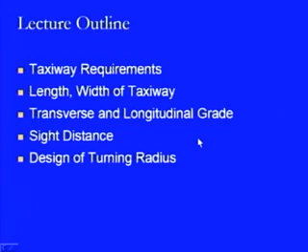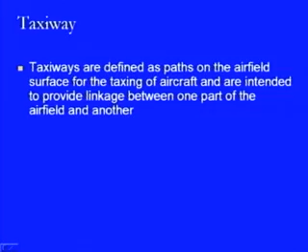We start with the taxiway and try to define what is a taxiway. Taxiways are defined as paths on the airfield surface for the taxiing of aircraft, intended to provide linkage between one part of the airfield and another. This means we try to provide connectivity for aircrafts which are arriving at any airport, so that they can taxi on this particular lane away from the active runway strip on which continuous movements are going on. In that sense, it provides connectivity between different locations or parts of any airport, and all such connectivities are termed taxiways.

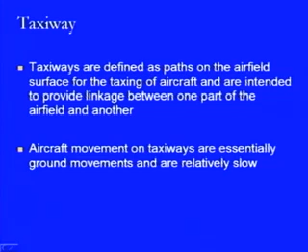These taxiways have aircraft movement which are essentially ground movements. There is no air movement associated with these, and the movements are relatively slow, much slower compared to the speeds at which the aircrafts have landed or at which they are going to take off.

Another type of taxiway is the dual parallel taxiway. This name itself shows that there are two taxiways laid parallel to each other, and in this case the functional condition is that the taxiways can be exclusively used for single directional operation. That is, on two taxiways we have two opposite directional movements, where the aircraft will be taxiing in opposite directions.

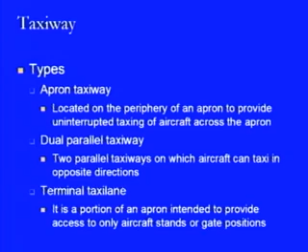Then the third type of taxiway is known as the terminal taxi lane. This is provided very near to the terminal building, and it provides access to the terminal in terms of access to the gate positions or stands where aircrafts can stand, so as to take the passengers, or so the passengers coming out of the aircraft can disembark. At that particular location, in between those locations, whatever lane is provided is known as the terminal taxi lane.

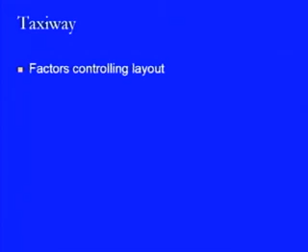We now look at some factors which control the layout of any taxi lane or taxiway. The factors are that there should be minimum interference between the just-landed aircraft on a runway strip and the ready-to-take-off aircraft coming towards the runway strip. This means there are two simultaneous operations going on: one aircraft is landing, while another is ready to take off. So connectivity must be provided such that there is minimum interference between these two types of operations and they cross each other with minimum hindrance.

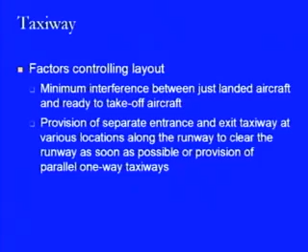Further, there should be a provision of separate entrance and exit taxiways at various locations along the runway, required so as to clear the traffic coming on the runway in terms of landing aircraft as soon as possible, making them available for the other landing operation or takeoff operation. In this case we can also provide parallel one-way taxiway systems, where on one taxiway aircrafts are coming towards the runway strip, while on the other taxiway aircrafts are coming from the runway towards the terminal area. That is how parallel one-way taxiways can be provided.

Another important thing at the time of fixing the layout of taxiways within the overall airport space is that there should not be any intersection of a taxiway with the active runway.

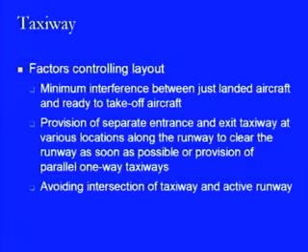The reason is that these two components have different speed conditions. The active runway has a much higher speed value, whereas the taxiways have the speed of aircraft which is quite low. Therefore, if there is an intersection, then movement of an aircraft on the taxiway from one side to the other side of the runway strip will cause delay for aircrafts using the runway for takeoff. At the same time, if there is a landing, it may create a hazardous condition or even an accident if such an operation is going on at an intersecting taxiway and runway.

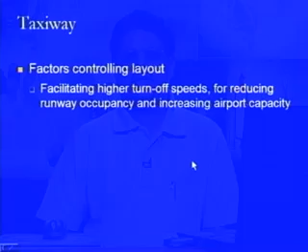Further, there is a requirement of facilitating higher turn-off speeds for reducing runway occupancy and thus increasing airport capacity. What this signifies is the design feature of the connectivity of a taxiway with the runway.

This design feature should help in facilitating the turn off at a much higher speed, and if this is possible, then with a little reduction in the speed of the landing aircraft, we will be able to take the aircraft off the runway strip and bring it to the taxiway strip. This will help in reducing the overall occupancy time of the runway strip by an aircraft, meaning the same runway strip can be used for another operation, and thus the airport capacity will increase.

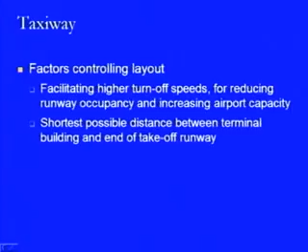Another point is that there should be the shortest possible distance between the terminal building and the end of the takeoff runway. This needs to be taken care of so as to provide the minimum travel from the terminal building to the runway strip at the time of takeoff. We also try to have a similar condition for aircrafts which are landing and come towards the terminal building or towards the airport stand to which they will be taken, so that passengers can deboard.

With these aspects in mind, we will now look at the different geometric features of any taxiway. These include the length of the taxiway, the longitudinal gradients, the rate of change of longitudinal gradients, the width of taxiway, the sight distance, the transverse gradient, the width of the safety area, and the turning radius.

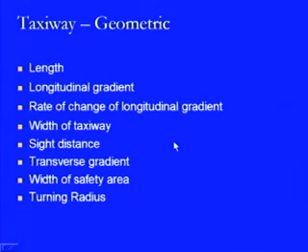So, these are the different geometric features which we will be looking at, and it is in a similar form as we have done in the case of the runway strips.

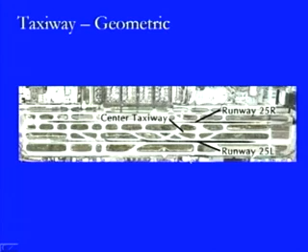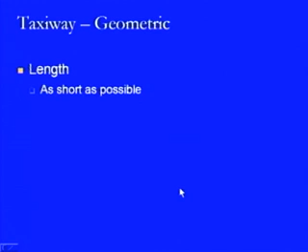With this aspect in mind, we start with the geometric features, that is the length. The length of the taxiway should be as short as possible. It will increase as more taxiways have to be provided along the runway. As we have seen in the previous case, there were different connectivities, so it will increase the overall length of the taxiway.

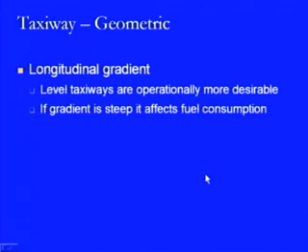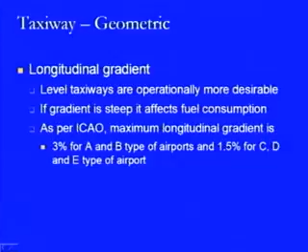In the case of the longitudinal gradient, level taxiways are operationally more desirable, similar to the condition for runway strips. If the gradient is steep, it affects fuel consumption. This is again similar to what we discussed for runway strips. As per ICAO, the maximum longitudinal gradient is fixed depending on the type of airport: for A and B type airports it is designated as 3% maximum, whereas for C, D and E type airports it is defined as 1.5% maximum.

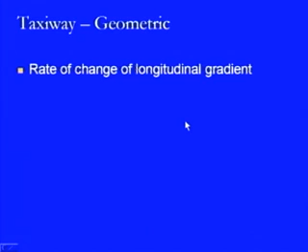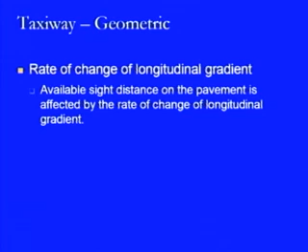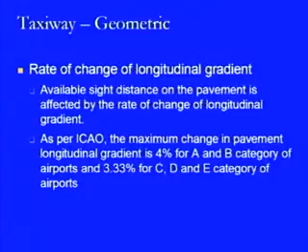Another specific feature related to the longitudinal gradient is the rate of change of longitudinal gradient. This rate of change is controlled by the sight distance available, and the available sight distance on the pavement is affected by the rate of change of longitudinal gradient, so it is a vice versa condition between the two things. Again, as per ICAO, the maximum change in pavement longitudinal gradient is fixed at 4% for A and B category airports, and at 3.33% for C, D and E category airports. So these are the specifications related to the rate of change of longitudinal gradient.

In the same case, for the rate of change of longitudinal gradient, this change of grade should be smooth enough. It should not create any jerk at the point where connectivity is being provided, otherwise it will be problematic for the movement of aircraft across that point. So smoothing is to be done, and this can be provided by the use of vertical curves, as we have seen in the case of runways, railways, or highways - the concept remains the same.

Therefore, vertical curves of 30-meter length are provided at such junctions. There is another specification associated with this, along with the rate of change. We are talking here about the vertical curve, and its length is fixed at 30 meters.

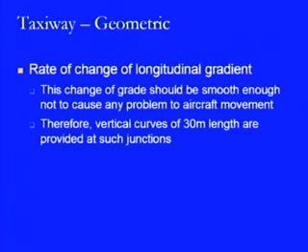Now, in the case of airports designated by letter A and B, ICAO recommends the length of the vertical curve as 25 meters for each 1% grade change. So if there is a greater percent of grade change, we multiply it with 25 meters to get the length of the vertical curve.

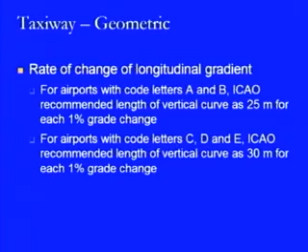Whereas in the case of airports designated by code letters C, D and E, ICAO recommends the length of the vertical curve as 30 meters for each 1% change in grade. So these are the specifications with respect to the type of airport and the recommended rate of change, along with the length of the vertical curve and the overall value to be provided.

Then similar conditions apply with respect to FAA. FAA recommends the distance between points of grade changes. This is what we saw in the diagram of grade change from x to y to z - that is plus x to minus y to plus z - with a change in gradient from x to y designated A, and a change in gradient from y to z designated B. For taxiways, FAA defines that this value can be 30 times of A plus B.

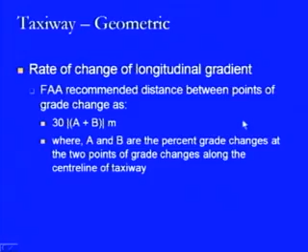This A plus B is taken in absolute form, where the effect of positive or negative value is taken away. So A and B are the percent grade changes at the two points of grade change along the center line of the taxiway. This is another recommendation and guideline for provision of different grades, while maintaining a distance between those changes of grade.

Now we come to another geometric feature of the taxiway - the width of the taxiway. The width of the taxiway is lesser than the width of the runway. The reason is that aircraft are not airborne and speeds are small in this case. Therefore we can control the movement of the aircraft better compared to movement on the runway, because a small change in the controlling feature of the aircraft when it's on the runway at higher speed may be disastrous, whereas on the taxiway, because speeds are very low, the steering will not create any big effect even if the taxiway width is lower.

Further, there is not much variability in the maneuverability of the aircraft. That is what I was discussing - in normal movement of the aircraft on the taxiway in a certain direction to reach the destination, that is the terminal or the runway, the nose of the aircraft mostly follows the taxiway center line. This is the guideline provided, that the pilot follows the center line of the taxiway and the nose keeps moving along it, and whatever width is required for that is to be provided.

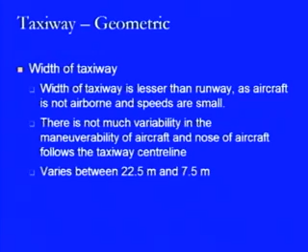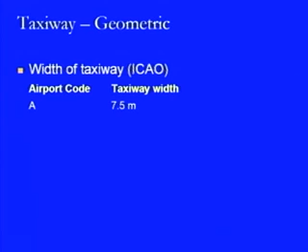Generally, the width of the taxiway varies between 22.5 meters and 7.5 meters. As far as ICAO recommendations are concerned, the width of the taxiway is defined in terms of the airport category. If the airport code is A, the taxiway width is 7.5 meters. If it is B, it is 10.5 meters. If it is C, it is 15 meters, and it is at times provided as 18 meters if the taxiway is used by aircraft with a wheelbase equal to or greater than 18 meters.

In case of a D category of the airport, the taxiway width value is 18 meters, and similarly here also it is enhanced to 23 meters if it is used by an aircraft with an outer main gear wheel span equal to or greater than 9 meters.

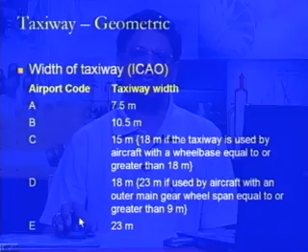In the case of category E, this value is 23 meters. So these are the various categories of airports for which the taxiway widths have been defined, and these vary from 7.5 meters to 23 meters.

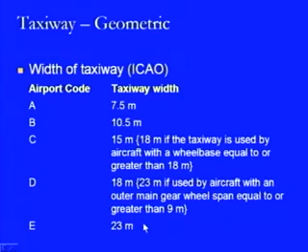Now another specific geometric feature of taxiway is the sight distance. As we have discussed, this sight distance is more important at the connectivities.

As the speed of the aircraft on taxiway is lower than the speed on the runway, a smaller value of sight distance is sufficient on the taxiway.

We know that we have computed the value of side distances from the very starting when we studied highway engineering, and there we have seen that as the speed keeps on increasing, the sight distance keeps on increasing.

It becomes something like 180 meters at a speed of 100 kilometers per hour, whereas at a speed of 40 kilometers per hour the sight distance requirement is around 50 meters.

So in a similar form here, taxiways are governed by lower speeds of aircrafts, and therefore the requirement of sight distance is also lower.

ICAO recommends that the surface of the taxiway must be visible at least up to a distance of x from any point at a height of y above the taxiway surface.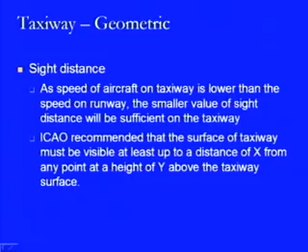That is, if we are at any point at a height of y above the surface, then we should be able to see up to a distance x.

How these x and y values have been defined by ICAO, we will look at those values. They have been defined with respect to the airport code, that is the categorization of the airports.

For the airport code A, the y value, that is the height above the pavement surface, is 1.5 meters, and in this case the sight distance should be 150 meters.

Whereas in the case of airport code B, the height is 2 meters and the distance is 200 meters. For C, D and E category airports, the height is 3 meters, whereas the distance is 300 meters.

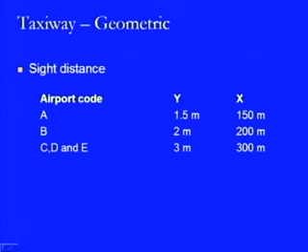Now we look at transverse gradient. This is another type of gradient which needs to be provided and considered when any of the geometrics have to be taken up.

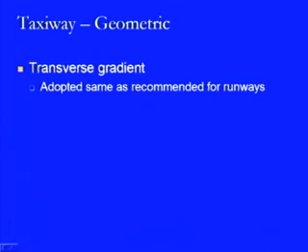Basically, they are provided so as to drain off the water and bring the taxiways back to a dry condition.

This ensures there is no slipping and no ponding of water on the taxiways, which may be detrimental or hazardous for the movement of aircraft on the taxiways.

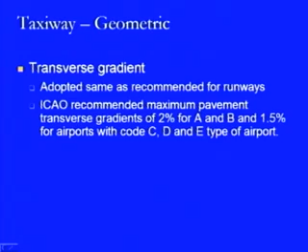ICAO recommends a maximum pavement transverse gradient of 2% for A and B category airports, whereas for C, D and E category airports, it is defined and designated as 1.5%.

There are also recommendations given by FAA. FAA says that a transverse gradient of at least 3% is to be provided for shoulders which have been turfed or provided with some fixed objects.

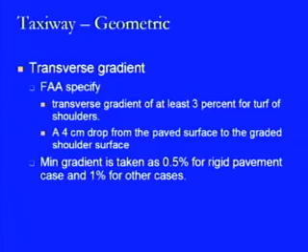This remains the same as in the case of runway strips, because here as well as there the concept remains the same, and that is the drainage of water.

Further, values are defined by ICAO where the minimum transverse graded portion is defined for the maximum transverse value, for the various airport codes ranging from A to E.

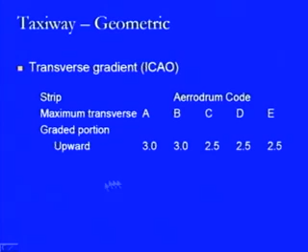In this case, if the graded portion is in the upward direction, the values range from 3% to 2.5%, starting from A to E.

If it is in the downward direction, we find that it is provided in a constant form at a rate of 5%.

Similarly, in the case of the ungraded portion, if it is in the upward direction, the value remains at 5%.

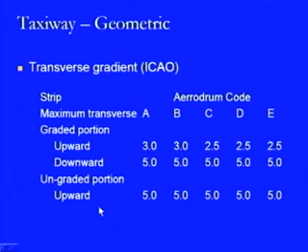The other thing we have to look at is the safety area and the width or total space to be provided for the safety area. The safety area is made up of partially paved shoulders on either side plus the area which is graded and drained.

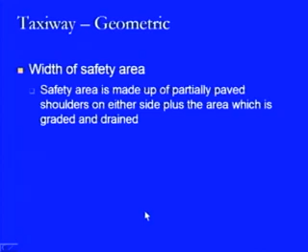And in this case, as we have seen in the case of runways also, we have to look at the area provided on the two sides as well as the area to be provided on the ends.

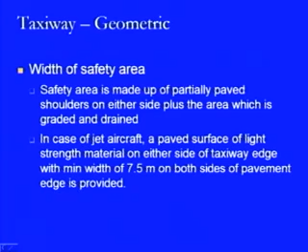In case of jet aircraft, a paved surface of light strength material on either side of the taxiway edge, with a minimum width of 7.5 meters, is to be provided on both sides of the pavement edge. Whatever is the width of the taxiway lane, varying between 7.5 meters and 23 meters, on the sides of that 23 meter taxiway lane we can provide 7.5 meters on one side and 7.5 meters on the other side. That means 15 meters more, and that becomes the overall safety area.

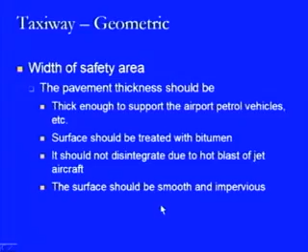Now we look at the width of the safety area - that is another geometric feature. The pavement thickness should be thick enough to support the airport patrol vehicles, etc. Another thing is the surface should be treated with bitumen and should not disintegrate due to hot blast of the jet aircrafts, and the surface should be smooth and impervious.

We have already seen what should be the size of the width of the taxi safety area, but apart from that there are certain things which need to be taken care of with respect to pavement thickness that have been enumerated at this point.

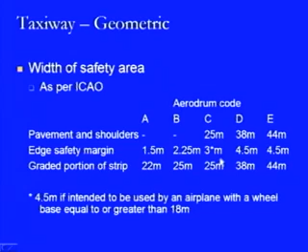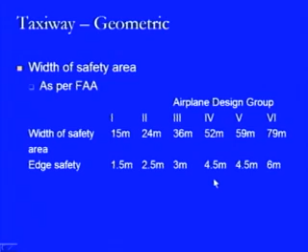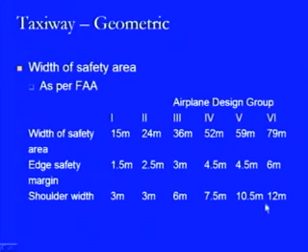In the case of edge safety, it is 1.5 meters for the first category, 2.5 for the second category, 3 meters for the third, 4.5 meters for fourth, again 4.5 meters for fifth and 6 meters for sixth category. Then we have the shoulder width, which is 3 meters for first and second categories, 6 meters for third, 7.5 meters for fourth, 10.5 meters for fifth and 12 meters for sixth category.

Now we come to another important aspect of the features of taxiway, that is the turning radius. This turning radius provides the transformation or movement from the runway to the taxiway, that is from a high speed to a low speed condition.

We have to adjust the turning radius so that it makes it possible for aircraft to take a turn at higher speed onto the taxiway and come to a lower speed condition. So the change in the aircraft path is done by providing a smooth horizontal curve.

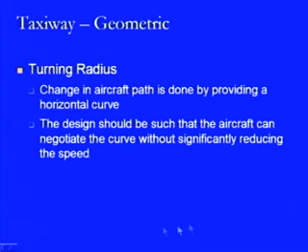The design should be such that the aircraft can negotiate the curve without significantly reducing speed, because at the time of the change from the runway to the taxiway through the connectivity - that is, the circular curve being provided - there should not be much change in the speed. Whatever speed the aircraft is coming with, it should be able to negotiate the curve.

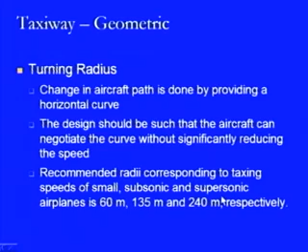The recommended radii corresponding to the taxiing speeds of small subsonic and supersonic airplanes are 60 meters, 135 meters and 240 meters respectively. For planes with a speed less than Mach 1, it is 135 meters, but if the speed of the plane is more than the Mach number, then it is 240 meters.

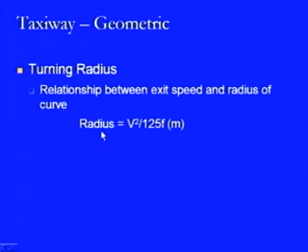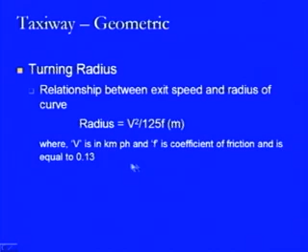The relationship between the exit speed and the radius of the curve is ascertained, and this value can be computed by this formula: the radius is V squared divided by 125F, and this value will come out in meters. Here V is in kilometers per hour and F is the coefficient of friction, equal to 0.13, which is fixed. So we have the fixed value of F, and another constant as 125. Therefore, there is only one variable which governs the radius, and this is the speed at which the aircraft is taking a turn.

So this is a turning speed, not the speed at which it is moving on the runway. So this turning radius, this is how we define it here in this diagram.

There is, say, the supersonic aircraft, meaning an aircraft which is coming at a much larger speed as compared to normal conditions, and we have this center line condition. So what happens is that in this case, if this is the 60 meter radius at which it is being provided, this is the center of the nose gear following the center line of the taxiway, meaning this nose gear is trying to follow the center line of the taxiway being provided like this.

So this is what the condition is, and then there is another pathway being shown on this side, and this pathway is the path of the point midway between the main gears.

So when the pilot is trying to maintain the nose along the center line, the two gears which have been provided, one on each side, will be adjusting themselves, and this will be the center line of those two main gears, meaning there will be one wheel moving somewhere here and another wheel moving somewhere here, and that is how they will keep moving on the two sides of this particular center line. So there is such an orientation which will be there.

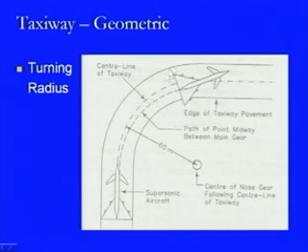Therefore, we have to provide this curve in accordance so that this aircraft does not go away from the edge of the taxiway pavement. So that is the main thing which is to be maintained, and this type of condition should not get created.

We will also look at some more diagrams here. This is another diagram where we can see a plane which is coming on this side, and this is the runway strip in this direction, meaning the aircraft is coming along the center line of this runway strip. So this axis of the aircraft is just superimposing on the center line of the runway strip.

And then as this connectivity is being provided, so we have this center line like this. So this is the center line of the curve, and then this is a position which is taken by the aircraft after taking the turn on the taxiway, and again it is aligned with the center line on this taxiway, with the wings coming out into the safety area.

So what is happening here is that this nose gear tries to track beyond the intersecting taxiway center line. This is a condition where it is trying to follow a judgmental approach of the pilot. The pilot is trying to move the nose of the aircraft along this pathway, the red pathway being shown here. This is on the basis of the judgment of the pilot.

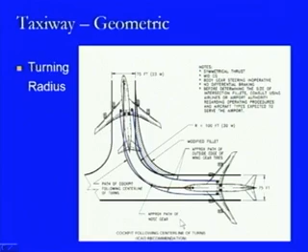So what we found is that according to Horonjeff, for supersonic aircraft, the radius of curve should be such that a minimum distance of 6 meters is maintained between the nearby main gear and the edge of the pavement. That is the premise, the principle or concept taken by Horonjeff. So clearance is 6 meters, and in this case the radius is given by 0.388 times the square of W, divided by the difference of 0.5 T minus S.

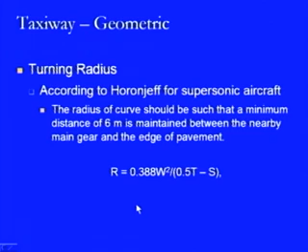According to Horonjeff, R is the radius of the center line of the taxiway in meters, W is the wheel base of aircraft in meters, T is the width of the taxiway pavement in meters, and S is the distance between the point midway of the main gear and the edge of taxiway pavement in meters.

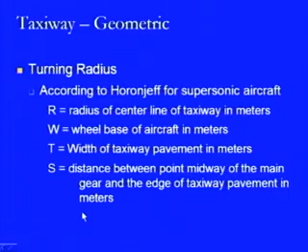This is how the values have been defined for this turning radius. This S, the distance between the point midway of the main gear and the edge of the taxiway pavement, is computed as 6 plus wheel tread divided by 2. This wheel tread we have already discussed - it is the distance between the two main gears located below the wings.

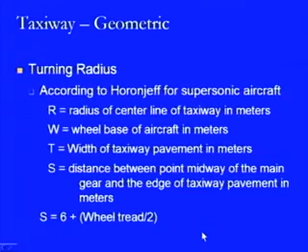Now we come to the fillets, which are the extra wide areas, as we have seen already, provided at the curve and traffic lane intersections so that the rear wheel does not go off the pavement edge. That is the function of the fillet. The minimum radii of the fillet is dependent on two things: the angle of intersection of the traffic lanes - that is the runway or the taxiway, or the taxiway or the taxiway, or the runway or the runway - and the wheelbase of the turning aircraft.

If the size of the aircraft is big, the wheelbase will be big, and therefore it requires a bigger turning area. Where if the size of the aircraft is smaller, the wheelbase will also be smaller and it can take a turn in a very small area. So the requirement of the fillet is governed by both things: the specification of the aircraft and the intersection angle.

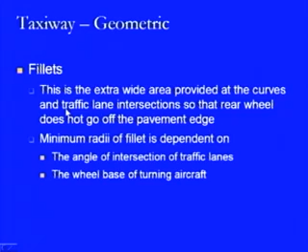The radii is not specified for wheelbase greater than 20 meters, and it is to be determined graphically using the path of the nose gear.

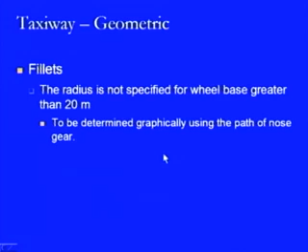For an angle of intersection between 0 and 45 degrees, the radii of fillet in meters for a small airport is defined as 7.5 meters, for a large airport it is taken as 22.5 meters. Whereas if the angle of intersection varies between 45 degrees and 135 degrees, the value for a small airport is 15 meters, whereas for a large airport it is 30 meters. If the angle of intersection increases beyond 135 degrees, the radii of fillet is 60 meters for small airports, and also 60 meters for large airports.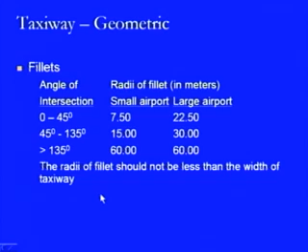This radii of fillet should not be less than the width of the taxiway - that is another thing to be considered.

Now we look at the fillet for different conditions. In the case of the small airport, we have the runway strip and the taxiway. Here the turning is more than 135 degrees, so the radius should be 60 meters at this location, where at another location it is governed with respect to an angle of 45 degrees, and therefore this radius is 7.5 meters. In another condition where the runway is connected with the taxiway, the angle is between 45 and 90 degrees, therefore the radius is 15 meters, and for an angle between 90 and 135 degrees the radius also remains 15 meters. That is for the small airport condition.

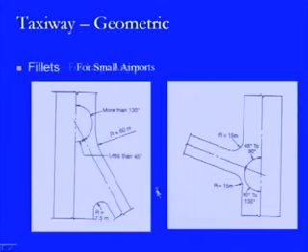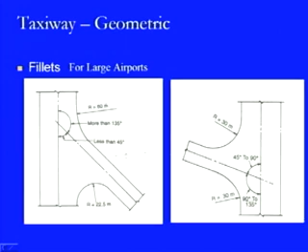In the case of large airports, again at 135 degrees the R remains 60. If it is less than 45 degrees, it becomes 22.5 meters. This is another diagram as we have seen for smaller airports. For 45 to 90 degrees, the radius is 30 meters as shown here, and similarly for 90 to 135 degrees the radius again remains 30 meters. So these are the typical diagrams or typical connectivities which can be provided.

Now we look at another aspect - the separation clearance between the taxiways which needs to be provided. This depends on the navigational aids, the type of the airport, and the wing span. These are the three factors which control the separation clearance.

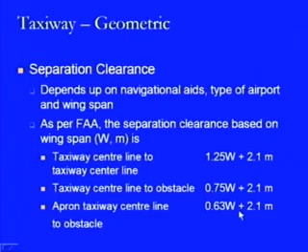As per FAA, the separation clearance is based on wing span. For taxiway center line to taxiway center line, it is taken as 1.25 times W, where W is the wing span, plus 2.1 meters. For taxiway center line to obstacle, it is taken as 0.75 times W plus 2.1 meters. For apron taxiway center line to obstacle, it is taken as 0.63 W plus 2.1 meters. So this is how we can compute the separation clearance based on wing span as given by FAA.

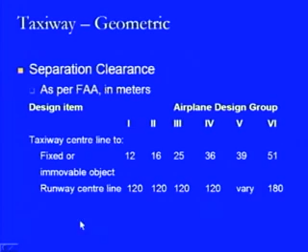Further, in the case that we are taking the distance from the taxiway center line to the fixed or immovable object, the range of the separation clearance varies from 12 meters in the case of design group 1 to 51 meters in the case of design group 6, with values of 16, 25, 36 and 39 in between. For the distance between the taxiway center line and the runway center line, the values in most cases are 120 meters. In the case of group 6, it is 180 meters, whereas in the case of group 5, it varies with the airport elevation.

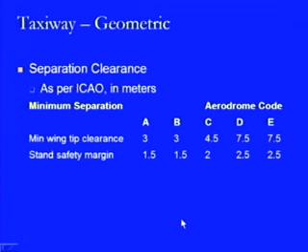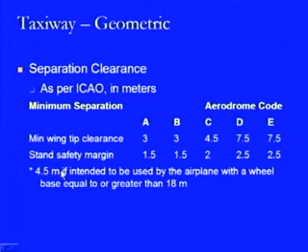We have some more values here: the minimum wing tip clearance is 3 meters for A and B category aerodromes, 4.5 meters for C category aerodromes and 7.5 meters for D and E category aerodromes. In the case of stand safety margins, it is 1.5 meters for A and B, 2 meters for C category, and 2.5 meters for D and E category. In case we intend for an airplane with a wheelbase equal to or greater than 18 meters, the value of 3 meters can be changed to 4.5 meters for category C.

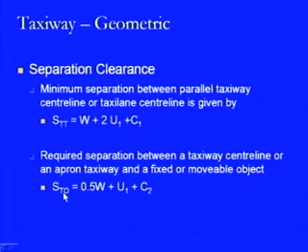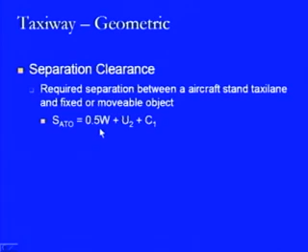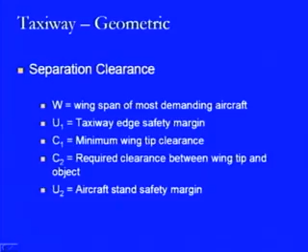The minimum separation between the parallel taxiway center lines, or the taxilane center line, is given by this equation: separation between taxiways equals W plus 2 U1 plus C1. The required separation between a taxiway center line, or an apron taxiway, and the fixed or movable object (T and O, where O is object) is given by 0.5 W plus U1 plus C2. There is another case where we have the separation between an aircraft stand taxi lane and the fixed or movable object, given by 0.5 W plus U2 plus C1. Here, W is the wing span of the most demanding aircraft, U1 is the taxiway edge safety margin, C1 is the minimum wing tip clearance, C2 is the required clearance between wing tip and object, and U2 is the aircraft stand safety margin.

So this is all about taxiways, their provision, requirements and design features. In today's lecture we tried to look at the geometric features as well as the connectivity of the taxiway with the runway using fillets and the radius. We also looked at the separation clearances which need to be provided between parallel taxiways, or the taxiway and objects, or the taxiway and other movable things.